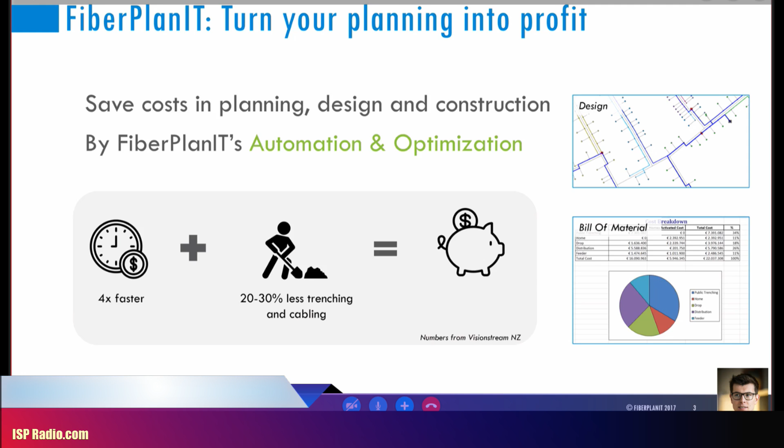Planning and design is a quite broad terminology. If we take a look at the workflow or process flow from just thinking about doing a network deployment to the actual operation, we focus on a few different stages of that process. In the planning stage, when you're merely thinking about doing a deployment and you have a large area or region where you're active, and you want to figure out which regions to target first, the FiberPlanIt simulator is the solution we built for that - it allows you to easily compare different target areas to see what it would cost to build, and make educated decisions based on that information.

Now, the topic I want to handle today in a demonstration is more the high-level design stage - doing the initial design of your network deployment, figuring out where to place cabinets, which type of cables to use, and how to route those cables. That's what I want to cover today, and I'll use the FiberPlanIt Designer for this.

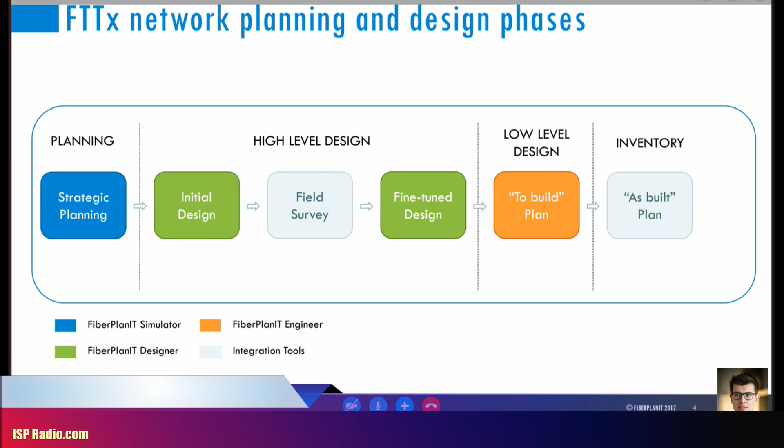That's a solution we will launch in February at the FTTH conference in Valencia, Spain. But like our other tools, it will be available worldwide. We also support integrations with other engineering and inventory solutions to speed up that process, because we noticed that a lot of our customers already have an inventory solution or a preferred solution they want to use, and we want to bring the power of FiberPlanIt within those tools.

Now, I don't want to keep you too long with a presentation, and I want to go hands-on with the solution so you can see it in action. But let me first explain a bit what I want to do in the demo.

So what I want to show is how you can do an initial design with the FiberPlanIt Designer, and basically you start off with a satellite overview of your area, so you know where your buildings are located, how the streets are running, so that you know where cables and where you could do trenching. Basically, with our tool, we need a geographical representation of that information. So you locate your buildings, locate your streets, and then you need to start by defining the different routes that are available. That's where the actual planner has an important role, making sure you get a constructible design and have permits for trenching at the different locations.

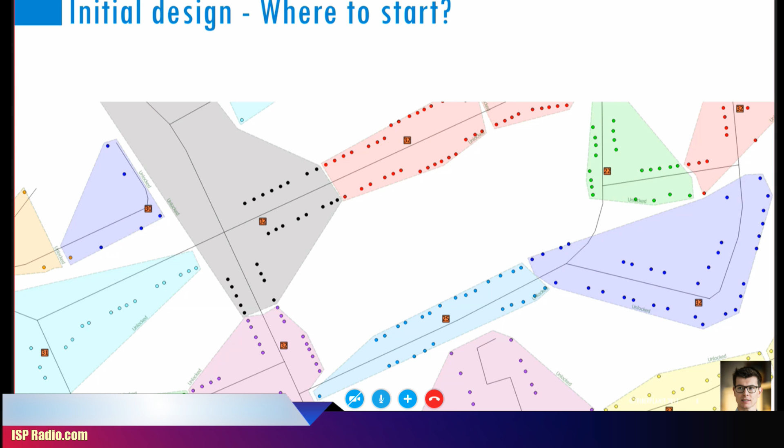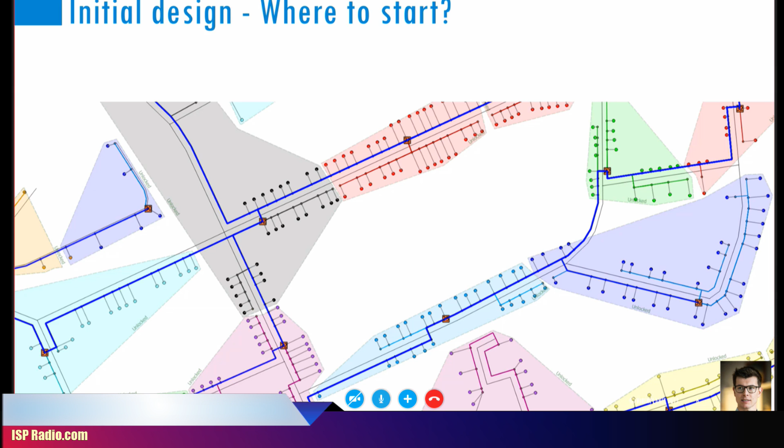Now, with the initial design, the goal is to locate your fiber concentration points and assign buildings to each fiber concentration point. That's what's represented with these clusters here. And then in the next stage, you need to make sure that every building is connected back to the central office. That's basically what I will show in the demonstration for a particular example.

Just to give you another view on this, basically with our tools you start from GIS information. I'll give you a quick example in the demo how I got information for an area that Stephen suggested me to design, and then with the designer, you specify the type of architecture that you want to deploy, and it will apply the rules, taking into account cost of trenching and so forth.

Apply those rules to the GIS data so that you get a high-level design, and then with the engineer, with integrations to other engineering or inventory solutions, you can come to a to-build plan which is ready for construction.

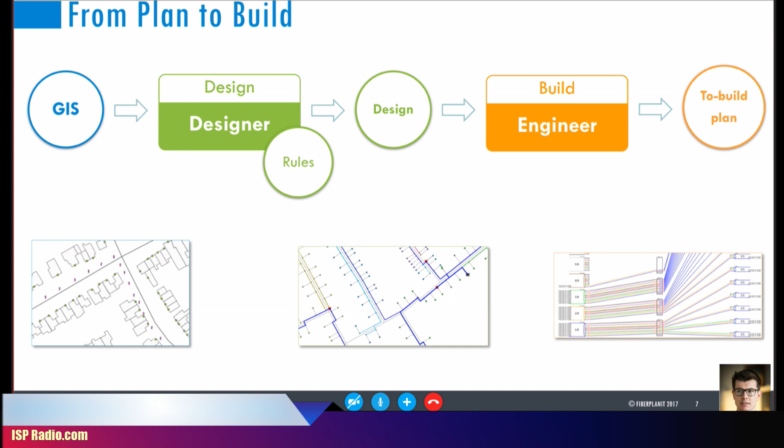So what I'll do is get the GIS data, configure the design rules of the architecture I'm interested in, and then go through a design iteration, and show you how you can then fine-tune that design to come up with alternative designs based on field input, and show you what the generated bill of material looks like, and show you the design details.

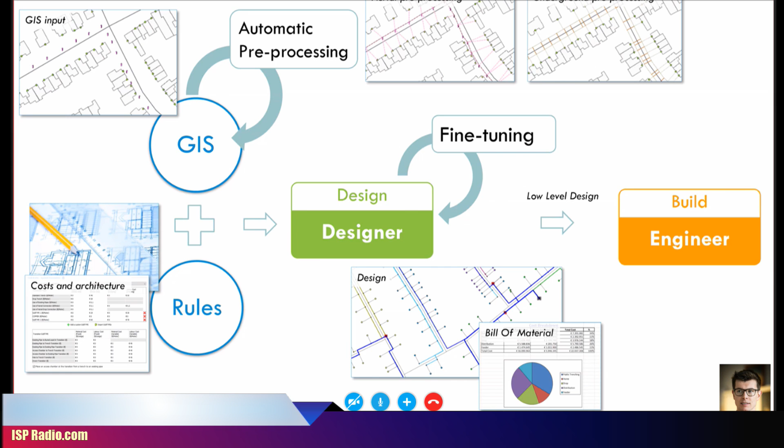And also I'll show you how to draw your endpoints quite easily in QGIS, which is the GIS tool, open source tool that we use for our design. And then I'll walk you through FiberPlanIt, and then afterwards inspect the design, inspect the bill of material that was created.

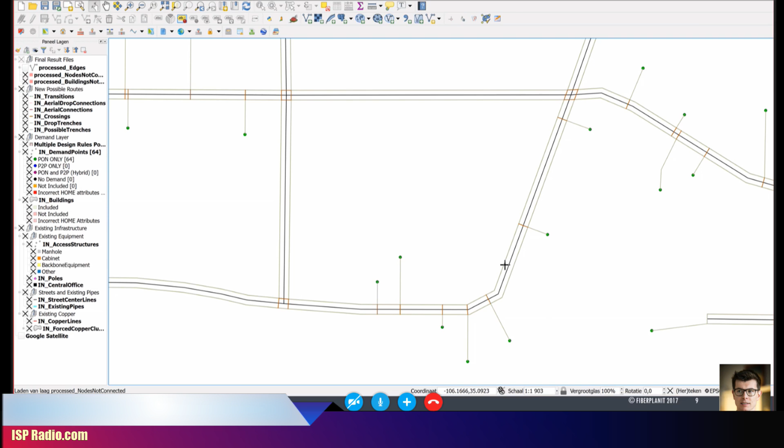No crossings will be generated there, and when the design is calculated, the software knows it cannot cross these roads and will take that into account for routing cables and ducts. So this is what a prepared area looks like. If I just save this—after doing edits, you need to save your design, save your prepared area. Then our GIS data is good to go, and the software knows exactly where it can route cables.

The second aspect that's quite important is network architecture. So in our solution, you need to provide unit cost information of equipment, the material and labor costs of deploying equipment and cables, and also all the different options - which sort of cables can be used and which sort of ducts can be used, and whether you will use duct or just directly bury your cables.

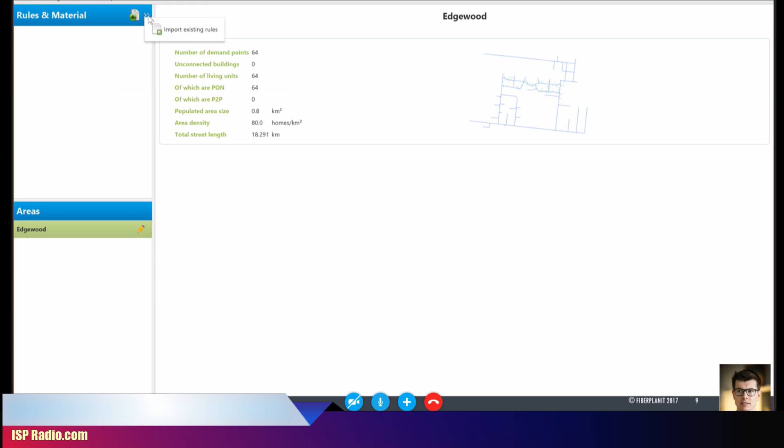Let me just load in the design rules that I prepared beforehand, and then I'll walk you through some of the configuration settings that I did. So Stephen, I asked you some - I wanted you to provide me some information on what your design will look like.

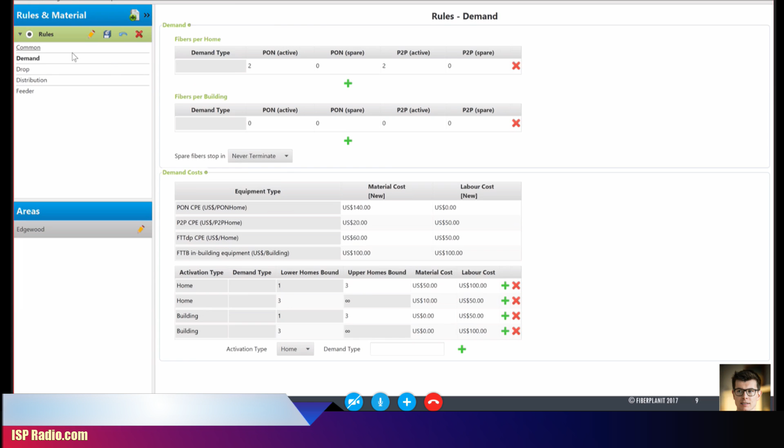So if I walk you through here, we'll provide 2 fibers for each home, and we're doing point-to-point design. So each home in my area will get two fibers directly from the central office location. In FiberPlanIt, you also have the possibility to do a GPON design, indicating where you want your splitters located and which type of splitters you want to use - that's also a possibility. But for this particular example, we'll do a point-to-point deployment.

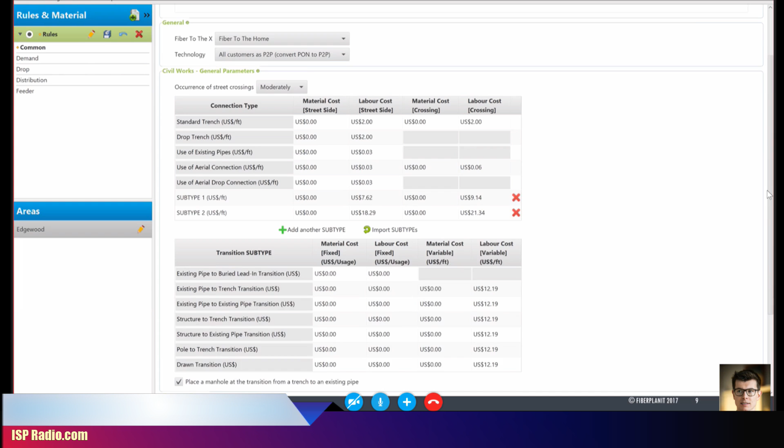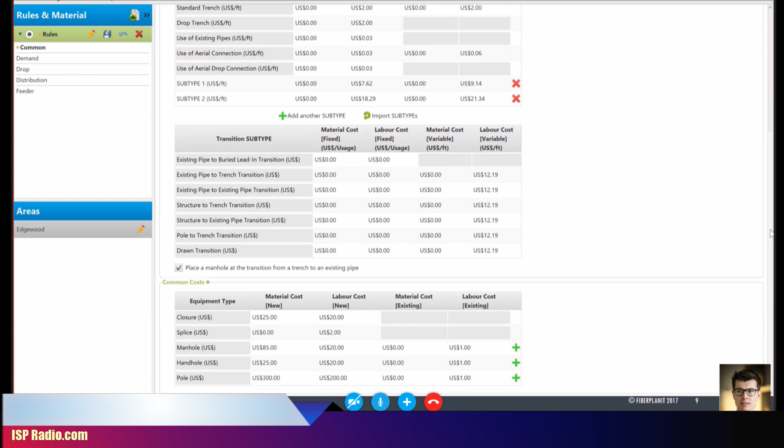Then secondly, what the software needs to know is how much it will cost to do trenching - how much for street side trenching, how much for lead-in, how much for crossing - so it can take that into account for doing the cable routing. That's information entered here. And then also some more general cost information, like the cost for closure, splice, manhole, handhole - all can be provided and taken into account for the design, and will be listed in the bill of material that's generated.

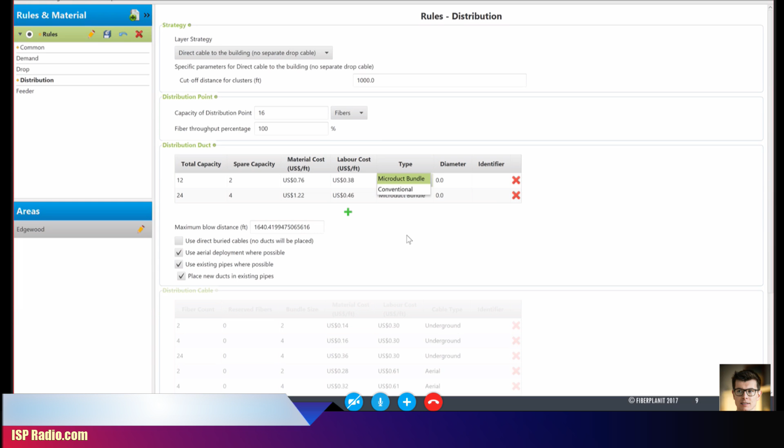So if we take a look at some other configuration settings - you can indicate whether you want direct buried cables or a microduct bundle or a conventional duct. So here we will use direct buried cables.

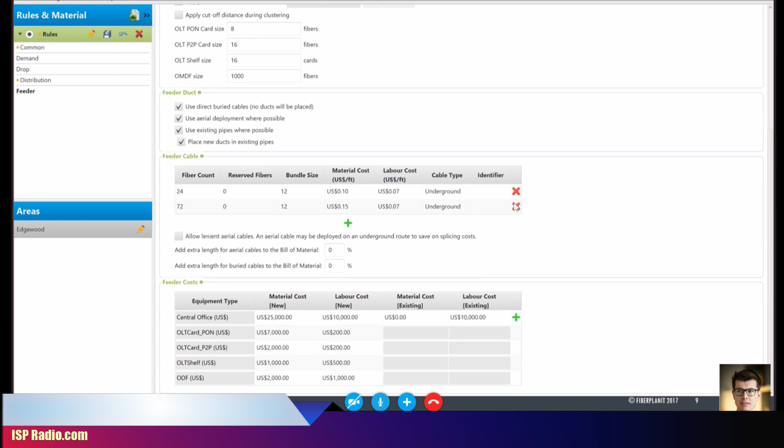Additional information that then needs to be provided is the type of cables that will be used. So here we can see the drop cable to the home, which is a 2-fiber cable with this particular cost. And then for the feeder cables, we have 2 options: either 24-fiber cable or 72-fiber cable, with this material and labor cost information. In the design rules, out of the box, a lot of...

Jonas, you there? We lose Jonas? Yeah, it sounds like it. Well, if that's the worst problem we're having, we're doing pretty good. Yeah, this looks pretty interesting to me, to see what my actual cost was versus an automated design. Yeah, I mean, this is the goal. I was gonna ask him some questions, but we had to get him back here. Yeah, he hopped off. Keep in mind, Jonas is in Belgium, isn't he? Yeah, Belgium. There's a storm over the transatlantic fiber optic network, I've been told. Well, hopefully we'll get him back here momentarily, and all will be good, if you know what I mean. Exactly. But since we're gonna pause here and see if we can get him back - really good information, it's really kind of neat.

Is this a standalone software that you're purchasing? I think it's cloud-based. If you remember, I had COS on the show a while back, and they're the ones that do the planning - finding out where the customers are at and what they want to pay and all that stuff. This is kind of taking all that information and driving it into a design, so it's automated. But like I did, I just took the Google picture and dropped points along the road there, decided I'll run a 72 strand here, and ran the lines off of there to the house - it's just meticulous. For a larger project I've been doing, I've had my ops manager, who's a bean counter, go through and audit the work I've done to verify that all the links for the 2-strand fiber going to people's homes are included in my numbers. Well, lo and behold, I forgot a complete street that missed out on a lot of the 2-strand.

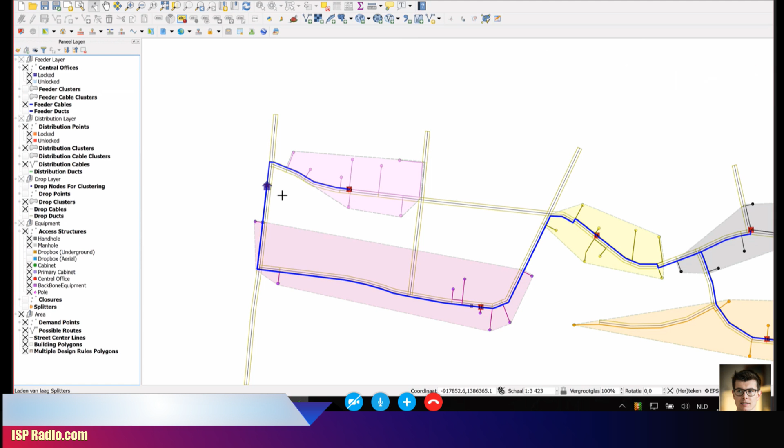But let's take a look at this high-level design. As you see, this is now my central office location, like I suggested. We have a cable running to this splice closure, and then cables running to my other splice closures. You can always see the size of the cable, so that's information that's available. It's an underground cable. Also, for each splice closure, you see how many fibers are coming in and how many are coming out, also the home count, so 8 homes per closure here. We configured that you can have 16 fibers per closure, and as each home has 2 fibers, this is how the software clusters the homes together to have a maximum of 16 fibers.

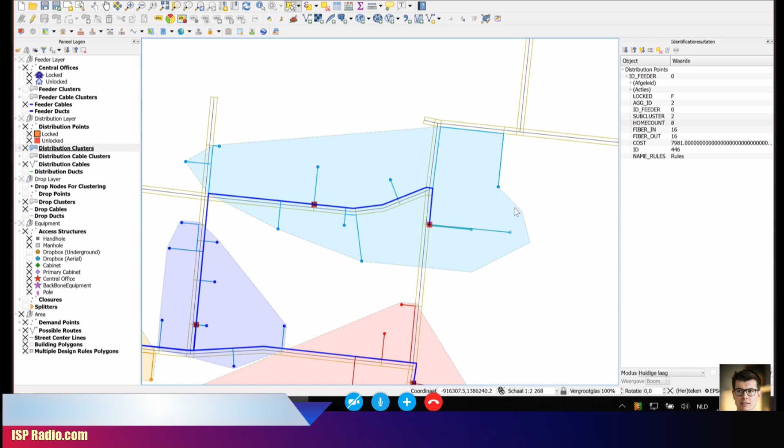But as a planner, you're free to adjust this plan however you want. For example, here it only provides a closure for these 2 homes, but if you know this closure has spare capacity to add these two buildings as well, you can do the same actions like I did with the central office. So you can adjust the clusters associated with the closures, include these 2 homes inside this cluster, and after recalculating, the buildings will now be connected to this closure. So the design that comes out of FiberPlanIt is your initial design, it's a suggestion. You are able to manipulate it as much as you want after this calculation, and as you saw, calculation can go quite fast, so you can easily manipulate and come up with a new design.

Before you moved the head end over to the left, it showed the design as I did it beforehand, running it down that main street with 72 strands. By moving it over there, it took into account all the homes and optimized, totally changing the route, optimizing for cost of materials and cost of trenching. Yeah, so by moving that location, it's a bottom-up calculation, from the homes to the central office, and by clustering the homes you create free routes for the feeder routing. If I switch this off, you will see it quite clearly. These are routes used for the distribution layer, for connecting the buildings back to the splice enclosure.

Now, if the software needs to calculate the route for the feeder cables, these are all routes where you will have to do trenching, so no new trenching is needed there. And this stretch here would be all new trenching. So it's much more efficient to run it over these distribution cables where you will have to do trenching already, instead of running it where no paying customers live.

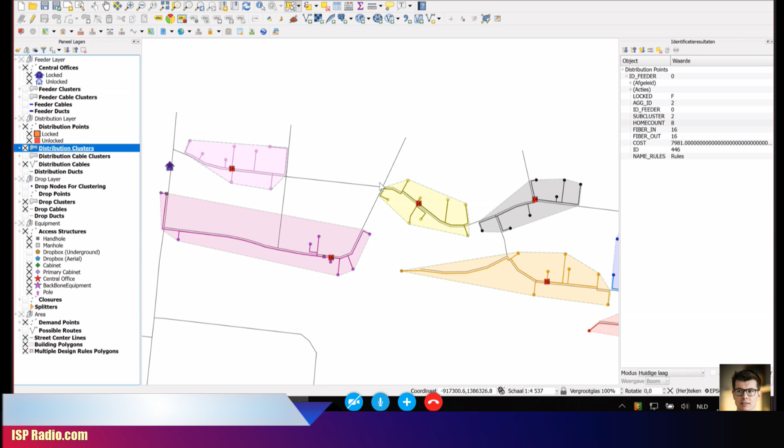Yeah, I think he's saying that in this particular case, you're going to have a trench open, so you want to layer your feeder cable in that instead of trenching where you're not going to have any customers. Exactly, it's taking into account the trenching costs we configured and also the costs for laying the cables. A large detour can, depending on the cost of the cables, be more expensive than doing a whole set of new trenches. So it takes all of that information into account to decide how to route cables.

So that's how we come up with this design. And with the design, the software always generates the bill of material. So you can see quite detailed how much trenching will be needed and what the cost is for this trenching, how many homes we activated, the trenching for the customer lead-ins, all the cables, all the splices, handholes - all of that information is available in the bill of material.

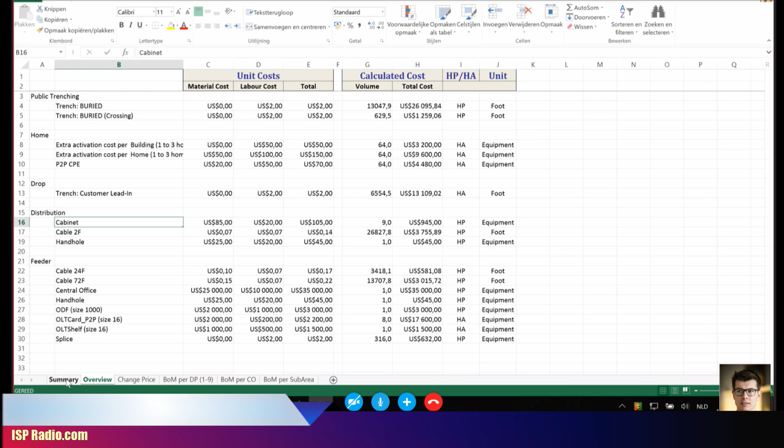Huh, that is very cool. So yeah, I can imagine that. For a manual design, I don't do any manual designs myself, but I can imagine that takes quite some time to come up with this amount of detail for your plan.

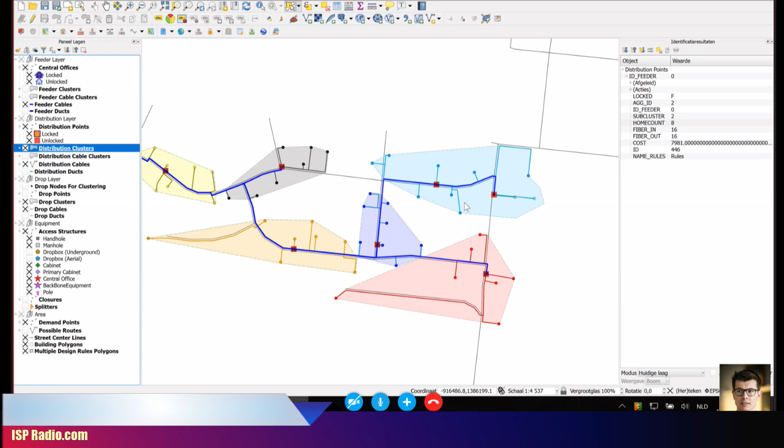I think one of the main advantages is that you can experiment with different types of architectures to compare the different costs, and you have full control over what the final design looks like. So like I said, while preparing the area, you can indicate which routes are unavailable - if there are certain streets which you cannot cross, or trenches which you cannot use, the user can manipulate that information to be taken into account for the design.

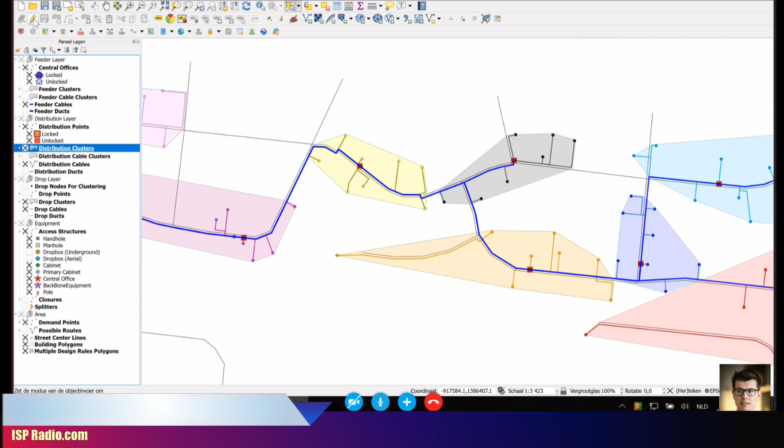Yeah, so you can sit there and say, oh, they have a concrete driveway, so you want to ensure that you don't have to plow underneath it or drill underneath it. And that, of course, could change which side your feeder cables are going to be on. Depending on that, it'll include it and recalculate for those. Right, it's really a matter of the more data you put into it, the better you are.

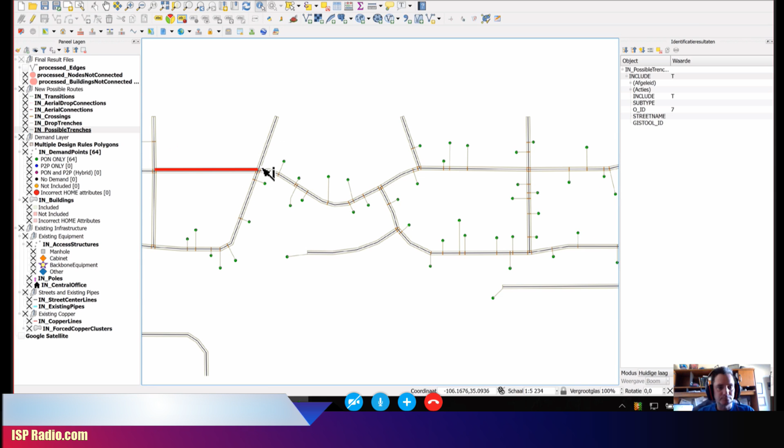Yeah, indeed. So, for example, if we look at the prepared area and the GIS data here, if I look at this particular side of the road, you can indicate a subtype - whether it's dirt road or whether it's asphalt. That subtype can be associated in the design rules with a certain cost, and that cost is then taken into account for the calculation.

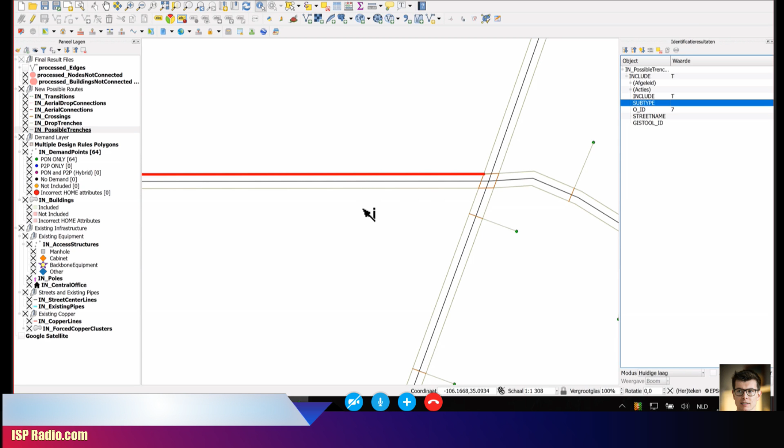Wow, and when you moved the head end to where you did, that was lickety split, and the design came back just like that. This is what the change did.

Yeah, so I mean, it's also quite scalable. Depending on the architecture that you configure and the size of the area, most areas of around 10,000 buildings - a calculation for that amount of buildings takes somewhat around an hour maybe, or half an hour to an hour, depending on the architecture that you define and the amount of routes which are available. But it's manageable to calculate it from your own computer.

I imagine that bigger project I did that took me so long, which I talked about while you were rebooting your computer, would have been reduced to pretty quick - number one, and number two, less errors.

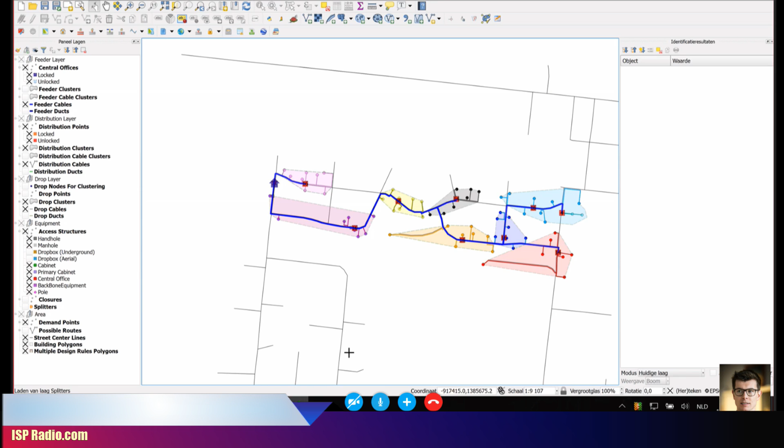Yeah, that's also one of the benefits. Let me switch back to my presentation where I have it listed. What the benefits are of using FiberPlanIt for your designs: deployment costs will go down. We have optimization algorithms, like I said, for routing the cables. But also your designs will be uniform. So imagine that you have a whole planning team spread across different offices, and you have a set of design rules or network architecture that needs to be followed.

With our tool, you can configure the design rules and make sure that all of the designs are uniform. That makes it so much easier for the field crew to deploy the network, so we'll introduce savings there. As you saw, it's an automated solution, so it goes a lot faster than manual planning. So you design much more efficiently, and you still have full control.

So what we did is move the head end. These kind of tweaks and changes are available to the planner, so he can still make decisions, take into account information from the field to make changes to the design, and still keep that level of optimization. So that cable route that moved from the main street to a different street, that's a perfect example, where you take into account information from the field, put it into the tool, and re-optimize your design.

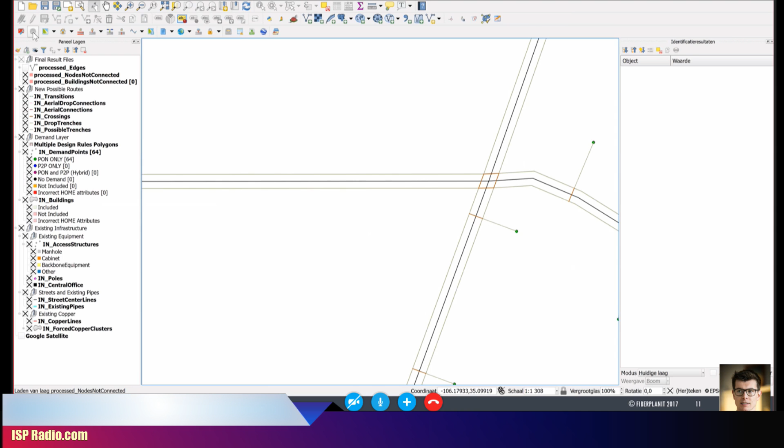You also have the possibility to indicate per layer of the network whether you want to use aerial deployment or not. This can be for security or safety reasons - you may not want your feeder cable overhead, but placed underground for extra reliability, so it doesn't snap easily and cut off connections for a lot of homes. That's a configuration you can do in the software, just disallowing aerial deployment for one particular layer of the network.

We've got two more questions, but before we get to those, I'd love to get your contact information so people can reach out to you about the product. They can reach me via my email address, which is badly styled here - that's Jonas.Verstuyft, V-E-R-S-T-U-Y-F-T, at FiberPlanIT.com or at comsof.com, whichever you choose.

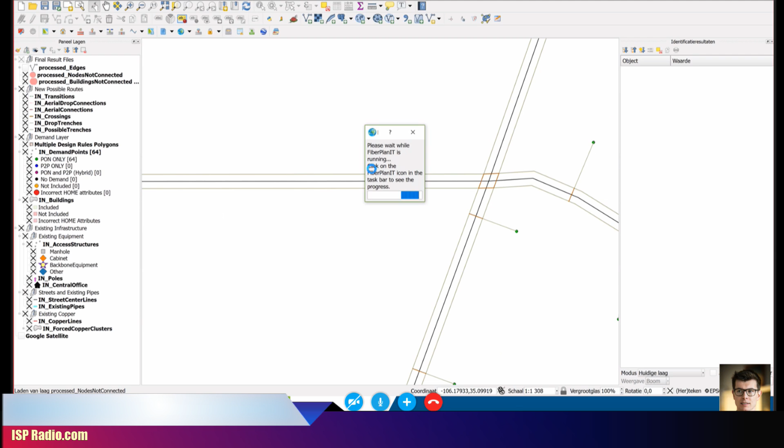The last question is: can we specify a trenching path that's not on a street, like an alley or a backyard? My assumption is yes, you just have to define it. Yeah indeed, the tool generates trenches from the streets, but you can add additional trenches or load them in immediately - not just load the streets, but immediately load possible trenches that can be used.

Let me ask this: if I have a map with 64 nodes on it, and my license is for 1,500, I should be fine with that license. Let's say I have another area that's not included in this one - is that area considered part of those 1,500 points, or is it 1,500 per map?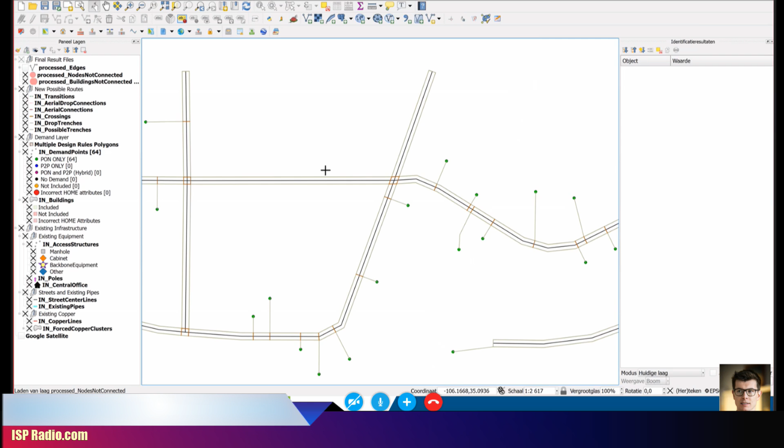No, the way to look at it is you have a credit pool of 1,500 buildings, and each time you move to a new area, credits are subtracted from that pool. So for this area, 64 credits would be subtracted, and if I move to another area with 150 buildings, those 150 credits get subtracted from my pool. You can move to many different areas until you reach the end of your pool, and then you have to buy additional credits.

Okay, awesome. Well Steve, I think we're all set here. Yeah, what a great show and a great product out there, guys. Yeah, I think we're really good on the product and the show.